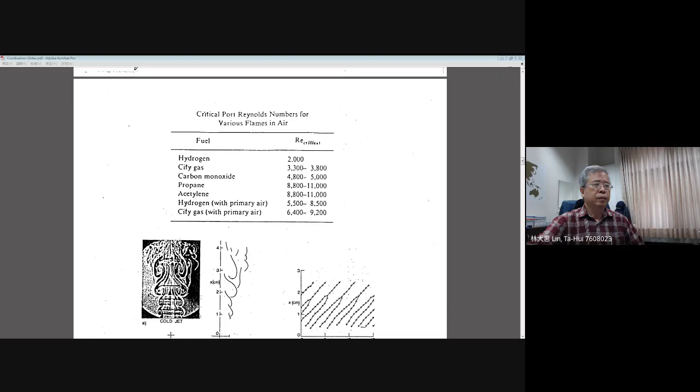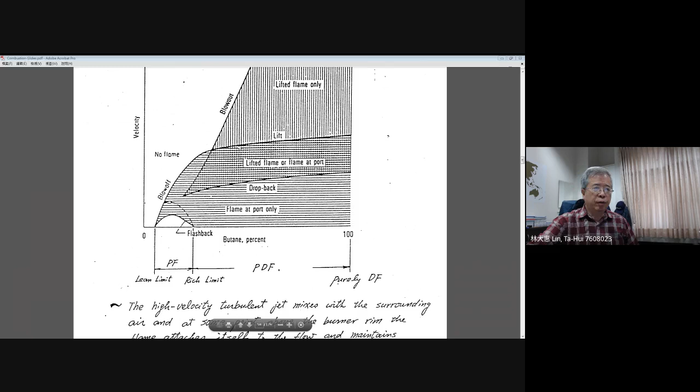Okay, we finished the stabilization limits for the premixed flame and the diffusion flame, and even for the intermediate regions between these two categories. And now we shift a little bit to discuss the critical port Reynolds number for various flames in air. And this table gives you an idea.

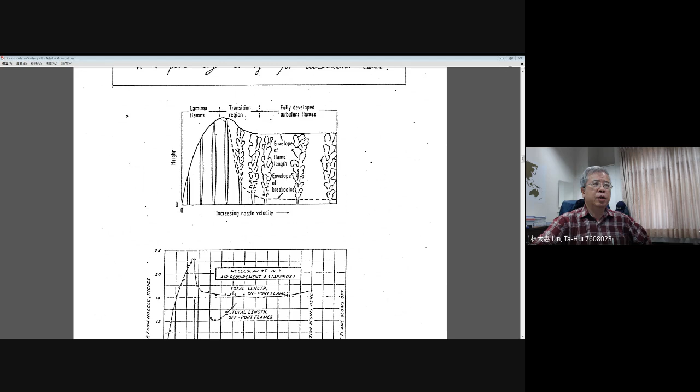Actually, this is a so-called critical Reynolds number corresponding to the flame transition from the laminar to the turbulent in this region, the critical injection velocity. Based on the port diameter and the viscosity and also density of your fuel jets, you can identify the critical Reynolds number for the transition of diffusion or these transition regions.

And this table tells you that hydrogen actually has a smaller critical Reynolds number, and the city gas, you can look at here. Hydrogen is a pretty light, small molecule, and it will induce turbulent flow earlier, so the critical Reynolds number is small. Okay, and the interesting thing is, for hydrogen the critical Reynolds number for the transition is around 2000, right?

But when you have some premixing, they show you with some primary air. Primary air means that you premix a certain amount of air into your fuel jet. With a certain amount of premixing, the Reynolds number will increase to the range of 5,500 and 8,500. In a similar way for the city gas, when you have primary air, the Reynolds number increases.

What is the meaning of the critical Reynolds number increase? When you have a larger critical Reynolds number for the transition region, it means the turbulence influence initiates later, it can be postponed to a higher velocity, which means it is not easy to produce the turbulent jet diffusion flame. Okay, it's more stabilized, letting your flame go back to the laminar situation.

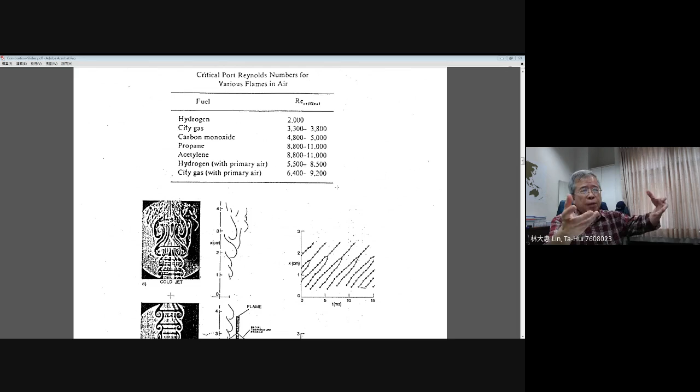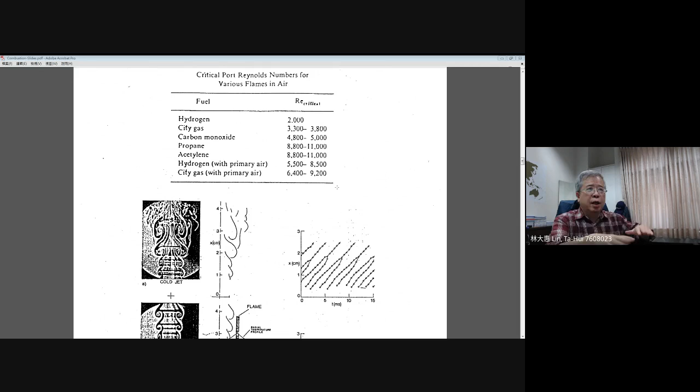Therefore, usually for piping viscous fluid, to make it easier to flow, you try to heat it up. When you heat it up, the viscosity is reduced, then the flow will move smoothly. Okay, this is for liquid, but for gas, it's a complete reverse. When you increase temperature, viscosity increases. When you have a higher viscosity, that means your Reynolds number will be reduced, right?

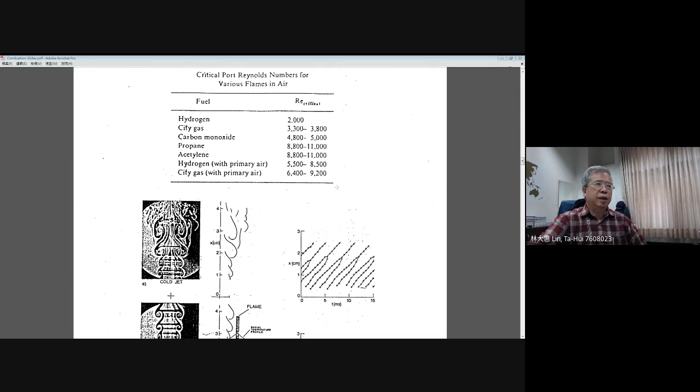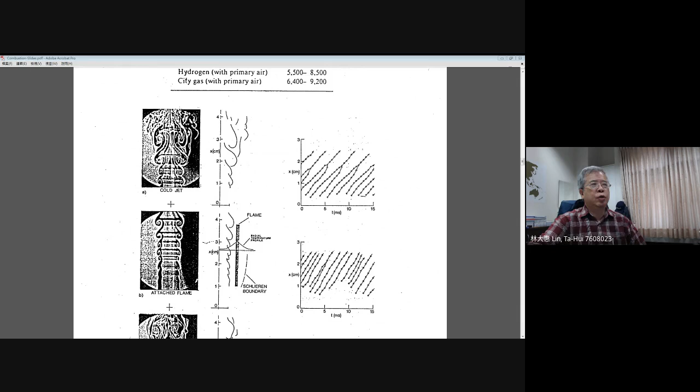Okay, for example, here you can see, as I explained earlier, for the same flow conditions, figure A is a cold jet structure. They have a very strong turbulent interaction between the eddies. But when you have a flame here, the flow structure becomes smoother, more like the laminar flame shape, and they do not have very strong turbulent eddy interactions.

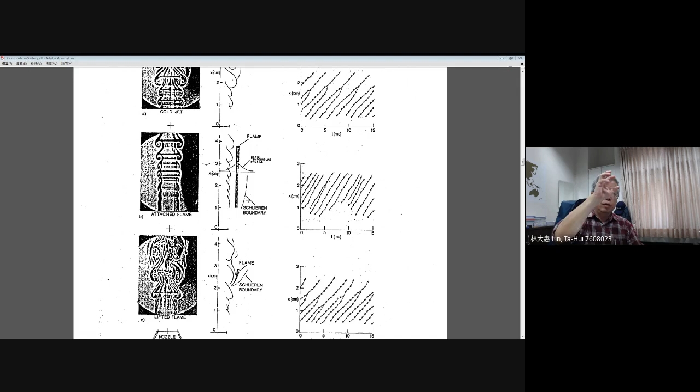And this tells you when you have a flame, the flow experiences heat release through the flame, temperature increases, then viscosity increases, and the increased viscosity will lower the Reynolds number of this jet. For the cold flow, the Reynolds number is pretty high, but when you ignite it, the temperature and viscosity increase, reducing the Reynolds number lower than the criterion for turbulent flow. Then this flame will become more stable, without those turbulent eddy interactions.

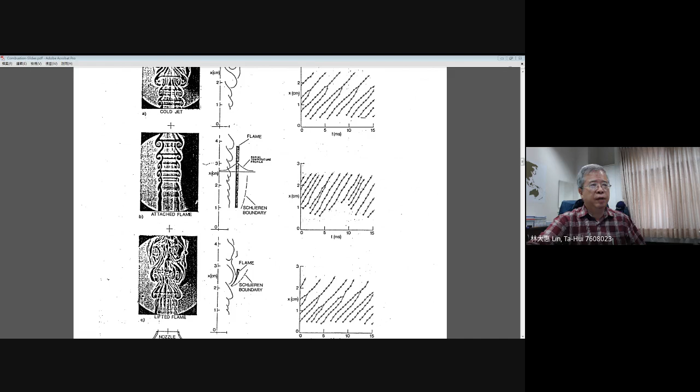Okay. But if the flame lifts off in this region, in the lower part, the turbulent eddies still have a strong interaction because this is a cold flow with relatively low temperature.

If the viscosity increase is not too much, the Reynolds number will still remain a large value, higher than the criterion for turbulent intensity. Then the flow will return to turbulent flow structures.

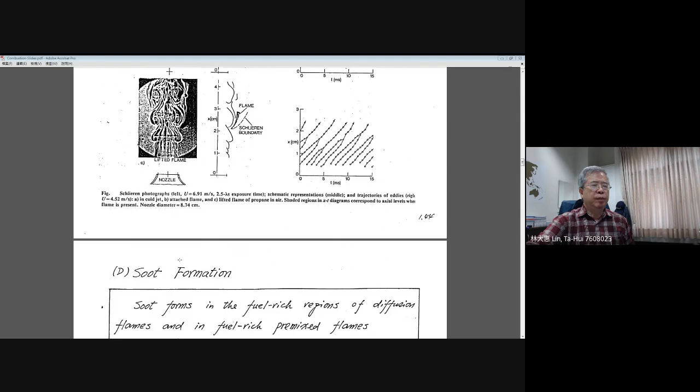Okay. Now the final part I want to mention, especially for the diffusion flame, is more focus on the so-called soot formation. Usually for premixed flames and diffusion flames, most of them we can see the yellow color flame. But for the premixed flame, usually you can have a yellow flame, especially for the fuel-rich premixed flame, especially for the higher hydrocarbon flame.

For example, it is very difficult to see the methane flame as a yellow color because they only have one carbon atom in a methane molecule, right? But propane and butane have more carbon atoms in a given fuel molecule. Then they can produce a more sooty flame. The carbon particle becomes stronger.

This is why people think about carbon emission, right? Because when you burn different kinds of fuels, which fuel will produce the larger amount of carbon dioxide on your downstream side? Definitely, people understand when you burn coal, because 1 kilogram of coal contains more carbon compared with one kilogram of methane. They have a much higher carbon content in coal.

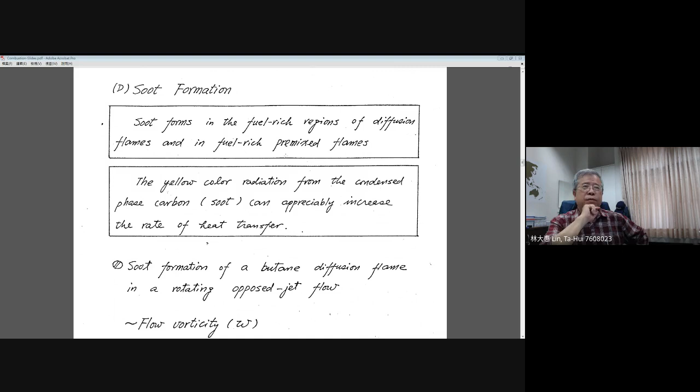But when you burn hydrogen, you will produce water as the major product, right? But actually, water, H2O, is one of the so-called greenhouse emission species, right? And it even has a stronger influence compared with the hydrocarbon fuels, carbon fuel, based on the same amount of mass. Okay, actually water has a strong greenhouse effect compared with carbon dioxide. Yeah, you can have a different kind of thinking to look at the problem.

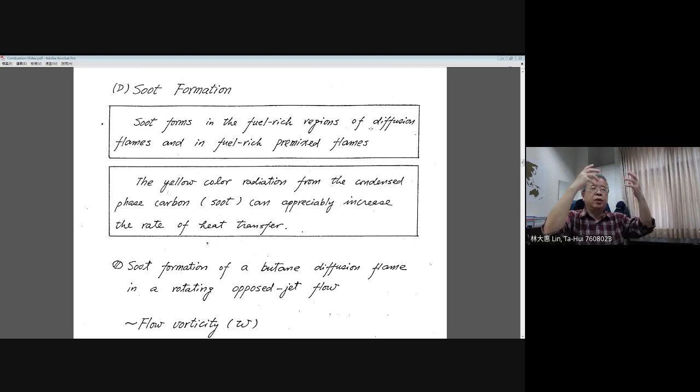But we go back to our discussion on soot formation. Here, we already explained there is a lot of soot formation inside the diffusion flame because of the separation between the fuel and the oxygen and the influence coming from natural convection. And for the rich premixed flame, you will have a strong possibility to have soot particles occur on the rich side of the premixed flame, but it depends on what kind of hydrocarbon fuel you used. If you have a higher concentration of carbon, then you will have higher soot particles occurring in the premixed flame.

Okay. And usually when we mention soot formation, it is accompanied with strong radiation. Those yellow color radiations will increase the heat transfer, that means the radiation heat transfer. Another important thing is soot formation is not a good one because it will produce pollution, right? Particulate pollution. But inside the combustion zones, actually they will enhance the thermal radiation. Thermal radiation is the major heat transfer in the combustor, in the combustion zones, to enhance the heat transfer.

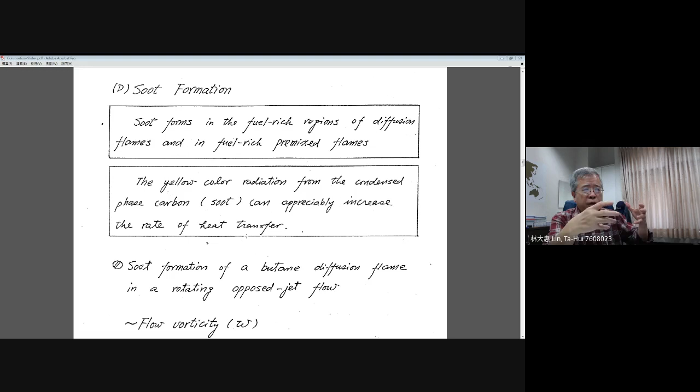Now you need to think about whether we can have those kinds of intense heat radiation in the combustion zone, and later on try to eliminate the soot. Then people think about the so-called staged combustion. Initially, they have rich burning. A lot of carbon will exist in the high temperature zone to enhance the radiation transfer. Then later on, we supply the so-called secondary air to finish all the burnout. Then you will not have soot or particulates on the downstream side. This is the way people think about how to control the combustion process. You still can have strong radiation heat transfer, but minimal emissions coming from soot particles.

Okay, but anyway, here I want to give you some experiment, to let you know, when you have some carbon atoms released from thermal pyrolysis, if they do not stay for a long time in the flow regions, they will move to the other region.

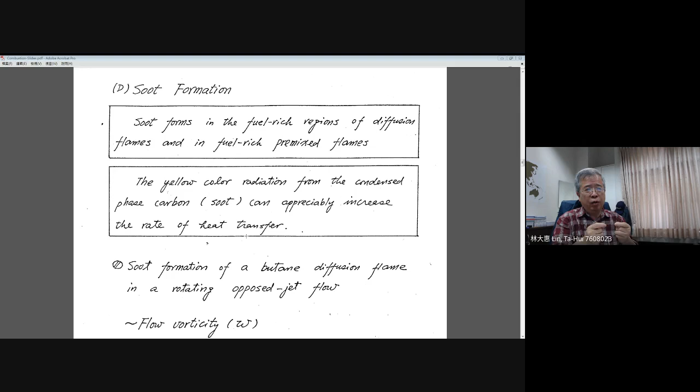But in many cases, they have longer residence times to finish the oxidation. Now the carbon molecules will hit together to produce the so-called carbon particle. Actually, the residence time of your carbon atom is an important consideration, an important criterion for soot formation.

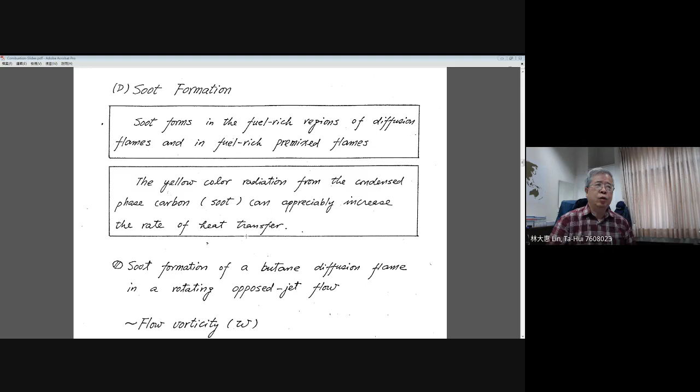Now, I try to bring in this kind of rotational motion to give you the idea to think about soot formation. It's not just governed by the concentration of your fuel and the concentration of oxygen, but also the residence time of your flow.

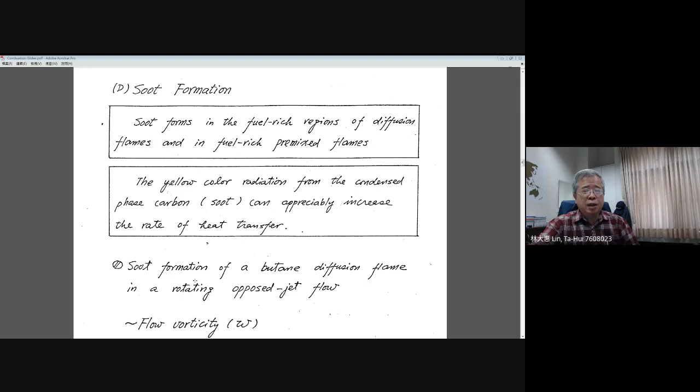Now we try to introduce flow vorticity into the diffusion flame in the opposed jet flow. I hope you remember this structure. We have a so-called counterflow, opposed jet flow, and we make it rotate, right? When you rotate your burners, the centrifugal force near the burners will push your axial momentum to radial. Because the axial momentum transfers to radial momentum, the axial momentum will be reduced.

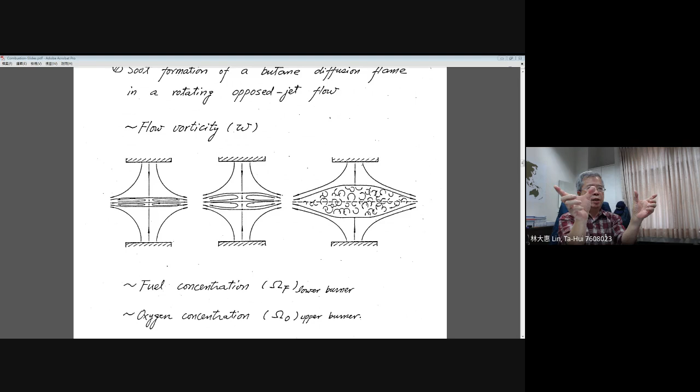When the axial momentum of your flow is reduced, that means near the stagnation point, the outward flow velocity will be reduced. Let's look at when you have a stagnation plane like this, and the flow moving this way. When you have rotation, the radial velocity along the stagnation plane originally may be large, but with increasing flow vorticity, omega, the rotation speed, the velocity will be reduced to a minimum.

Then the flow will move in a different direction, because the velocity diminishes to zero, right? And the flow will reverse from the outer surroundings to the inner region, which means you will produce a so-called recirculation zone here. So when you increase your flow rotation, your outer flow will be sucked around the stagnation surface into your flow, and here it will produce the so-called recirculation regions.

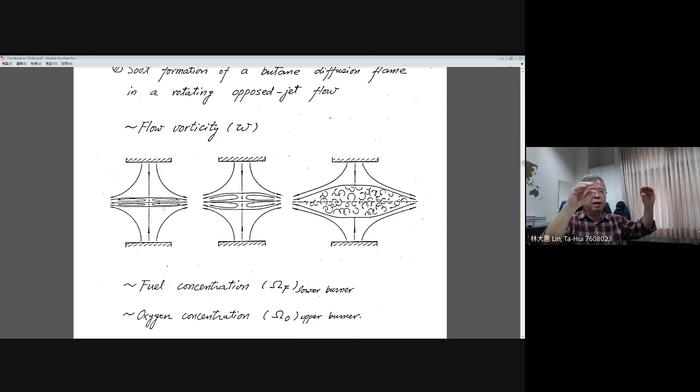And this is an ideal structure because we assume it is symmetric, and you will have a pair for our diffusion flame, in both the upper and the lower flow, and those regions will be increased.

And here we find the width of the recirculation increases to a certain value, because the flow coming from the outer region brings some fluctuation into your flow region. Especially in the center region near the stagnation plane, the flow velocity is relatively small, so it is easier to be influenced by outer perturbations. Then they will create these kinds of eddy structures. Let me go back to our slides to give some explanation.

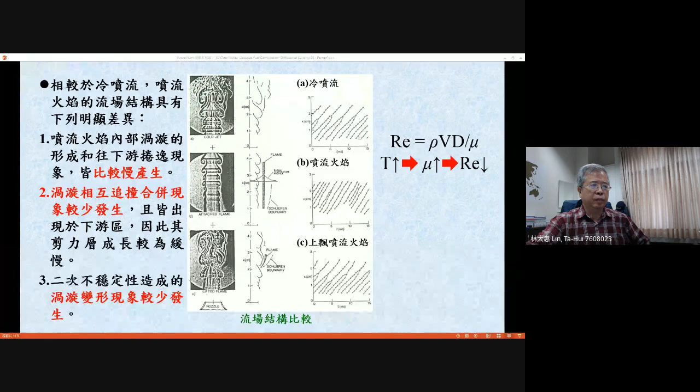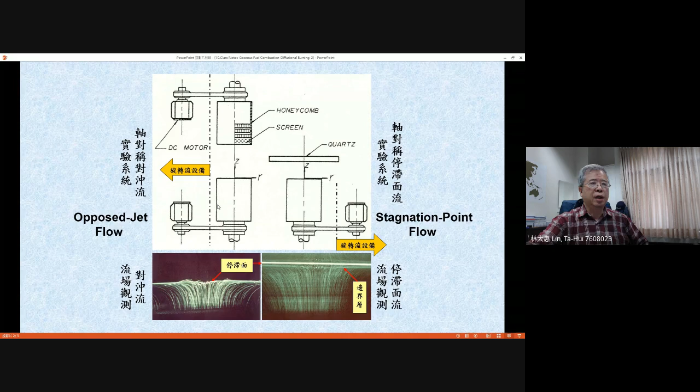This is just the previous slide to show you the system we have. There is the upper burner and the lower burner, and both burners have a belt connected to a DC motor, so we can make them rotate. And this is the flow structure I want to mention. In this experiment, we look at the influence of flow vorticity on the diffusion flame, which means we need to generate a diffusion flame.

In this case, for the lower burner, we mix the fuel and the nitrogen. We supply the fuel from the lower burner, and we impinge the oxygen from the upper burner. In the upper flow, the oxygen is mixed with nitrogen. Both fuel and oxygen are mixed with nitrogen to make the balance. And this is the cold flow structure.

When you do the experiment without burning, you can see from A, B, C, D, E, F, following this sequence, the rotation speed increases. This one is omega equal to 0, which means the flow is irrotational; we do not make it rotate. For a given shot, we use the same shutter speed. That means the velocity is large enough to make the whole straight line complete, as the particle moves along the same line.

You have this long line, but when you increase the rotation speed, you will find there is a small line, a second segment, and then another long line. This tells you that in this region the flow velocity is too small. The shutter speed is the same, right? But in this time interval, the particle has a small velocity, so the travel path becomes short.

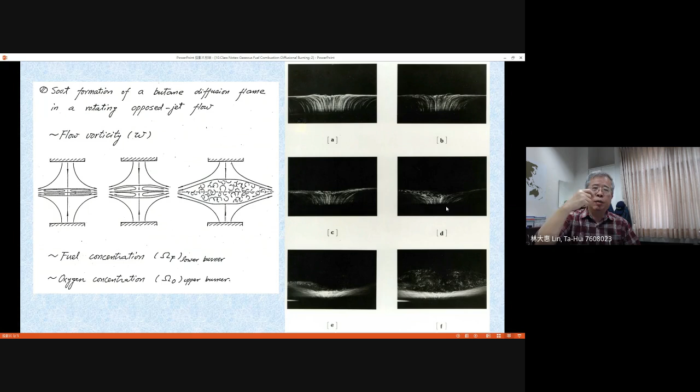Okay, and in this case, you can see we start to have some recirculation occur. But actually this recirculation should be symmetric on both sides, as we plot it in the left-hand figures. But here you cannot see the circulation on the right-hand side, right? This is due to an experimental problem. When you do long-term observation, you can see a pair. But when I took the picture, at this instant there was no particle carried into the recirculation. This kind of flow visualization depends on having particles inside the flow. Without particles, you cannot see the motion of your flow.

Increase the rotation further, you can see there is still circulation on the left-hand side. Also, you will see it on the right-hand side in the real experimental observation. Actually, both of them exist. Finally, you can see in this case the turbulent eddies occur over the whole region, and this is completely similar to the figures shown on the left-hand side. There is some eddy. You can see there is a small vortex. This is the cold flow structure.

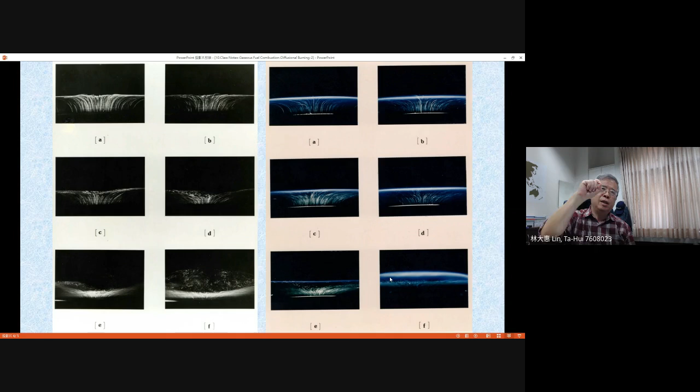And in this situation, you can figure out, because in this experiment we increase the flow rotation, near the stagnation plane the flow velocity is reduced. That means the flow convection is reduced continuously. With this reduced convection influence, the diffusion process supporting the diffusion flame still plays the major role. Therefore, the diffusion flame still sits at the stagnation plane unless a large region of turbulent flow is produced; then the flame becomes thick. The flame thickness is broadened to allow those eddies to move into your diffusion flame. Okay, this is a very nice experiment.

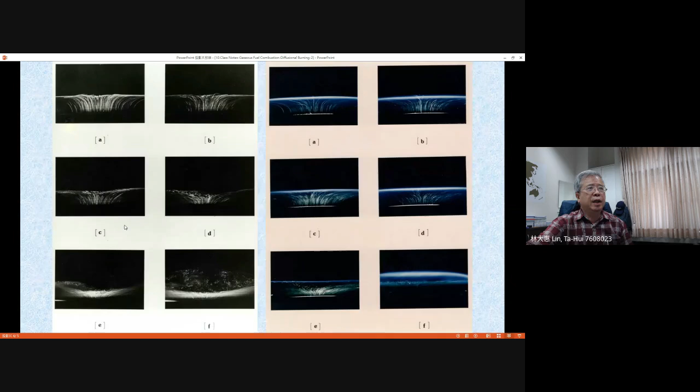When you increase omega, you reduce the radial velocity on the stagnation plane, right? And since the diffusion flame exists just at the stagnation plane, the radial velocity is reduced by increasing omega. This reduced radial velocity cannot move those carbon particles out. Originally, near the stagnation plane, the radial velocity carries gaseous particles from the center to the outer surroundings. Then if carbon atoms are released by thermal decomposition, those carbons will be carried out to the outer region.

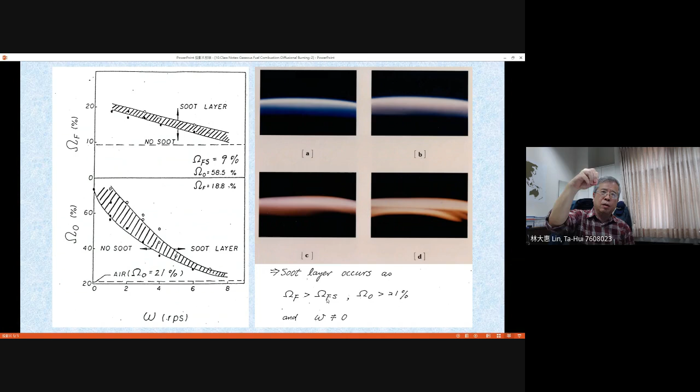From this experiment, we get some understanding of the criterion for the soot layer. The supply of fuel should be higher than stoichiometric; you need more fuel to provide more carbon source. And the oxygen should be richer than the original air composition, 21%. And increasing omega will help the formation of the soot layer, because it increases the residence time of the carbon particles in the stagnation plane. They will accumulate and coagulate together to produce larger soot particles.